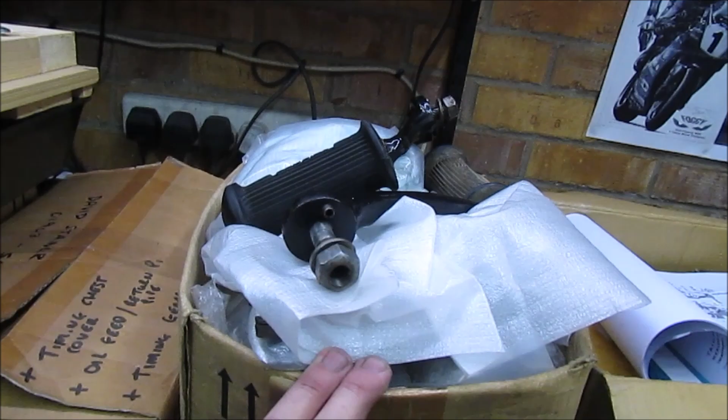But then we do have a couple of boxes - I've actually written on that one, because that's the bits I found miscellaneous, so I need to sift through that. Also I need to sift through this one as well. But most of the hard work's already been done with labelling up the boxes.

So like I said earlier, when I do my own, obviously I take it apart, I know where everything goes. As you remember with the Z, I always use boards for all the case bolts. But when you're doing somebody else's disassembly to reassemble, it's slightly more tricky.

One thing I did want to add - this is going to be a sympathetic restoration basically. Build the engine, give it a clean. But other than that, I'm not going to touch too much of it, so it keeps its patina of an aged 50-year-old bike. But it will just have a clean, nothing will be polished, it will just be clean. So that's the look we're actually going for.

So let's stop the chat and get into these boxes.

So as I'm going through some of the boxes, some of them are already labelled, which is great, some aren't, so I'm labelling up as I go.

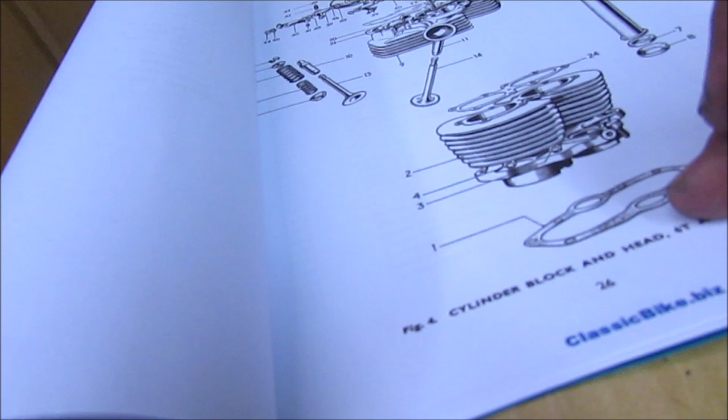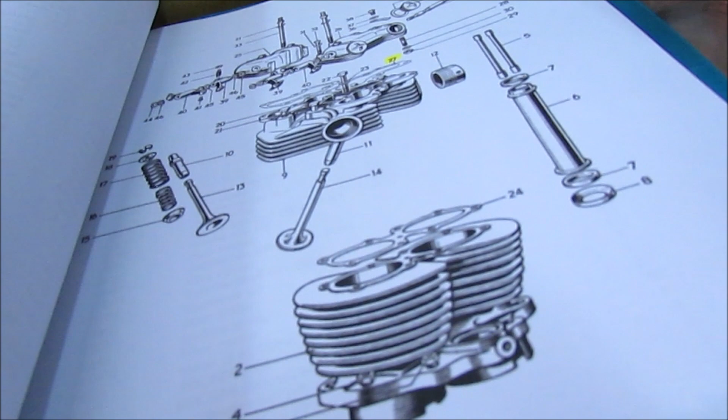But yeah, there's plenty to sift. So what I'm trying to find at the moment - found the barrels, gaskets are in the clear box, so I need to find these tubes. I know where the valves are, I know where the cylinder head is, that's already in a jig, keeping it flat. Need to find the 2 top rocker covers. So let me find as much of that as I can, clear the bench for a bit and lay that bit out.

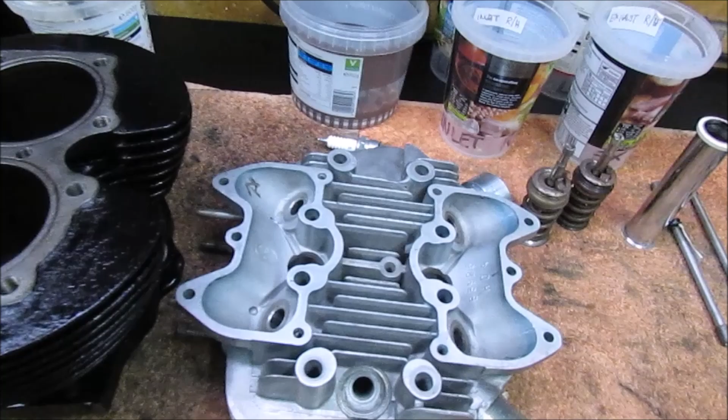So just by laying it out, it's actually starting to make sense. Obviously in there I've got all the head studs and the valve guides, so they need to be refitted. Valves in the correct order of what they go in. Again, they need to be cleaned up. Managed to find the exhaust clamp screws that go in.

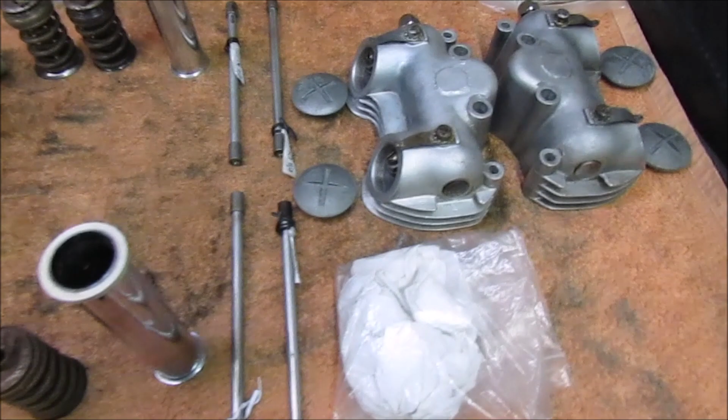Working our way up to the valve guides and to the actual head. So actually laying it out like that, it's actually starting to come together of what we've actually got.

Like I said, obviously gaskets are in a separate box, but at least it gives me an idea of the layout of how it would go - basically up from the crank through to the barrels, cylinder head, valves, etc.

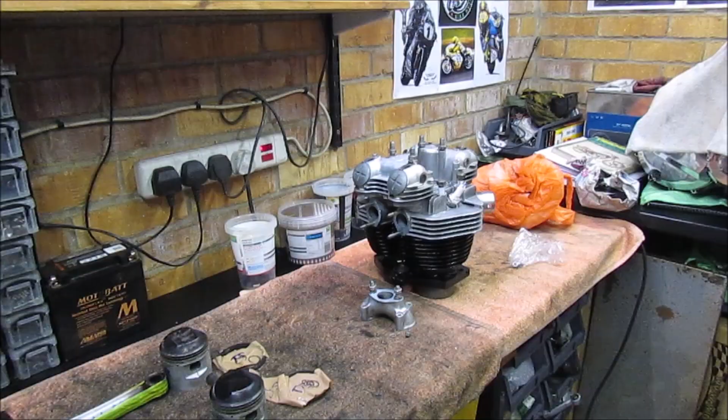Right, so to make it easier for me, I've just loosely put everything on. So you've got 4 main head bolts that go through with 4 big bolts. So I'm just working it out as I go at the moment, so I've got a rough picture in my mind how things go together.

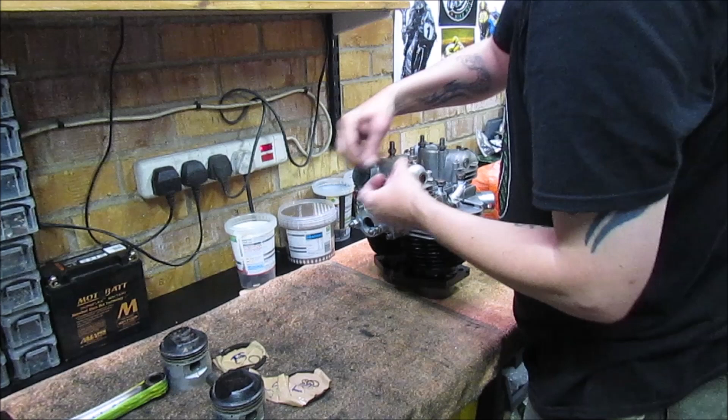So the carburetor manifold - so everything is going to be loose.

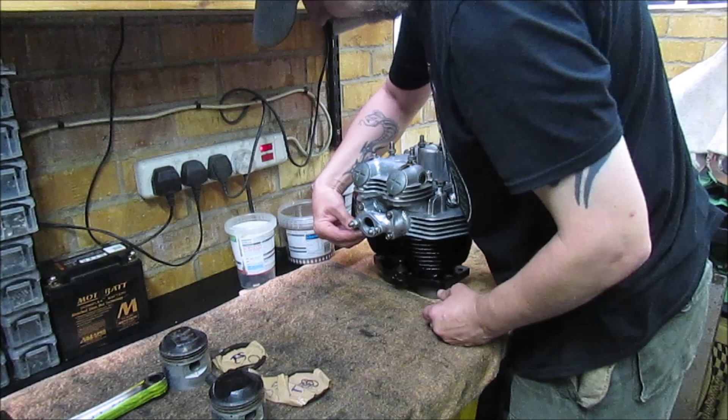I can also see if anything's missing. I'm missing a washer from the bottom corner of the carb manifold.

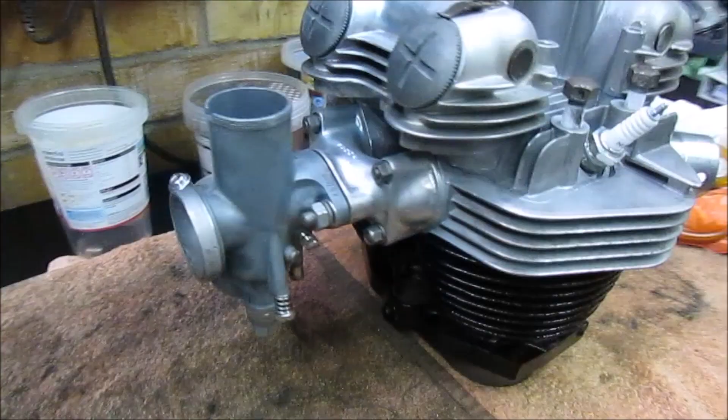Again, this will just be a loose fit, just so it gives me an idea of how everything goes. So I've still got the feed pipe.

Let's just take that out for a second. I know where that one locates.

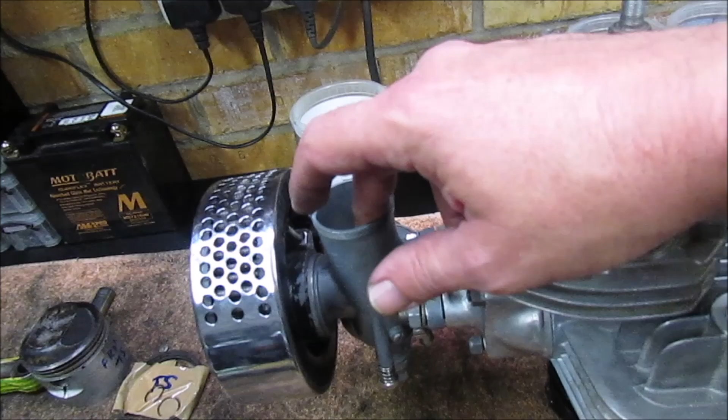Obviously I still need to find the actual throttle body. It's probably connected to the cables. So I've still got that box.

Might be it there actually. But no, that's... actually quite pleased with how that's gone. Just sifting through boxes, just finding the parts, having a look.

Right, I've actually just worked out, because these weren't marked out, I had them round the wrong way, because obviously they're the main oil feed.

So as it sits in the bike that way, obviously that'll be the front with the exhaust. There's two dome nuts which will have the oil feed. The oil feed's already connected to the bike still.

Right, so I can move this now to one side. I want to just have a quick look through some of the other ones.

Right, managed to find the clutch as well. Dug out the fiche picture for that.

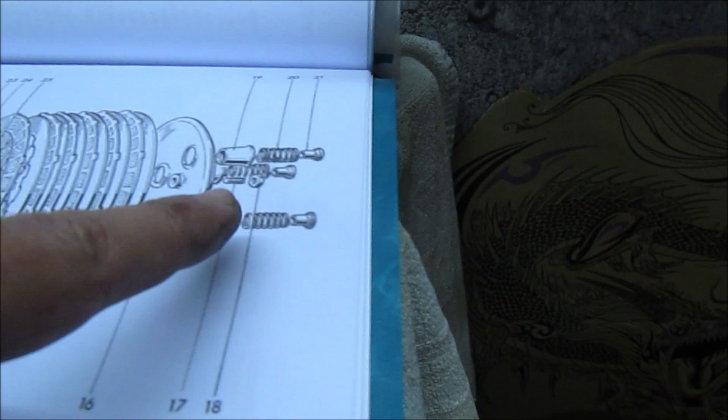So everything seems to be there, with the exception of the nut and the washers. So everything seems to be there.

Also found that plate, not quite sure where that's from, but that's another piece assembled.

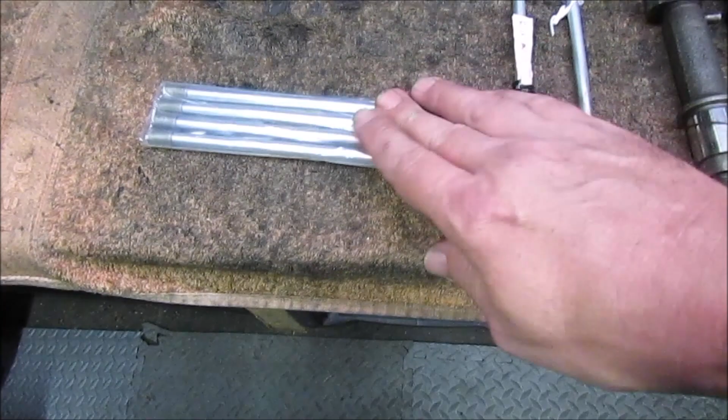I did actually find some of the new pushrods to replace these ones, because that one's missing an end. So there are 4 brand new ones.

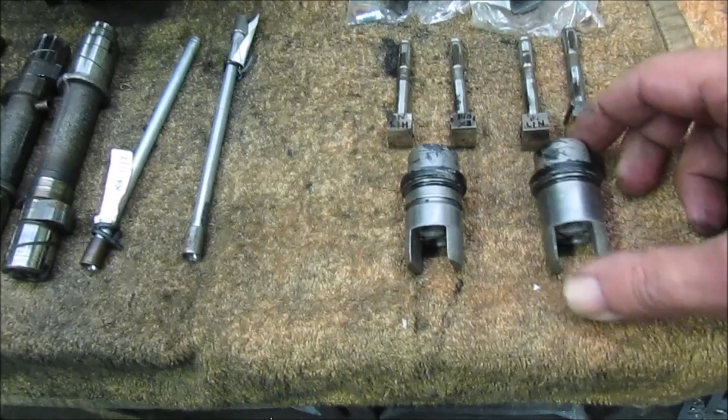Also laid out the oil pump. Not quite sure if they're part of it or not. Didn't actually see them in the diagram, but they were actually with it, so unless they're the top end.

But again, I've got plenty of research to do, but I just wanted to get parts laid out on the bench, have a quick mock-up, see how it goes together, see what parts are involved.

I've gone through practically everything. That is now just literally miscellaneous nuts, bolts, footrests, etc. All the boxes I've got down here in the clear ones, some of the stuff that actually came off that was old and being replaced, and all the other boxes are marked and labelled, and that's just some cases.

So I've got a side panel and a couple of the side cases and the points case. I've given them a quick clean, I've just wrapped them up for now.

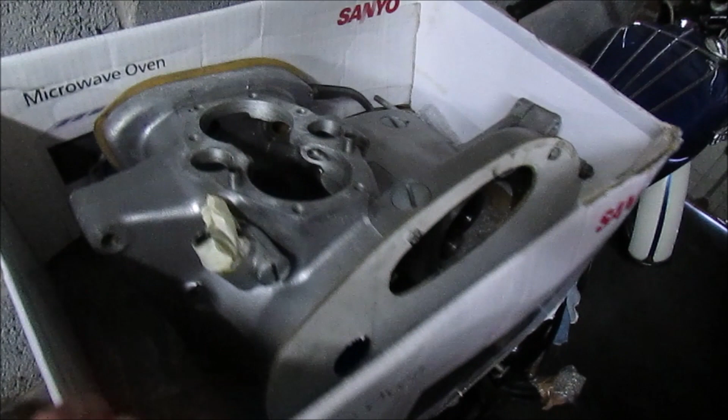And as I say, obviously the main crankcase itself. And I also need to investigate what's actually on there, because the oil tank's in there. But we'll take that up in the next episode.

Hopefully next episode we'll just be moving through, trying to piece together all the bits of the puzzle, and then we can start getting into actual assembly. As I said, the cases need to be heated up to get the 2 big bearings in place, but I need to make sure I've got all the parts, which I'm not finding at the moment, but as I say, there is more to go through.

But no, pleased with how everything's gone. The pushrod tubes I've just put in place, one at the front, one at the back. That's a pretty engine, I must admit.

But say, I've got plenty of reading material, so I'll be going through these as I go, learning as I go. This is fantastic. I'm loving this.